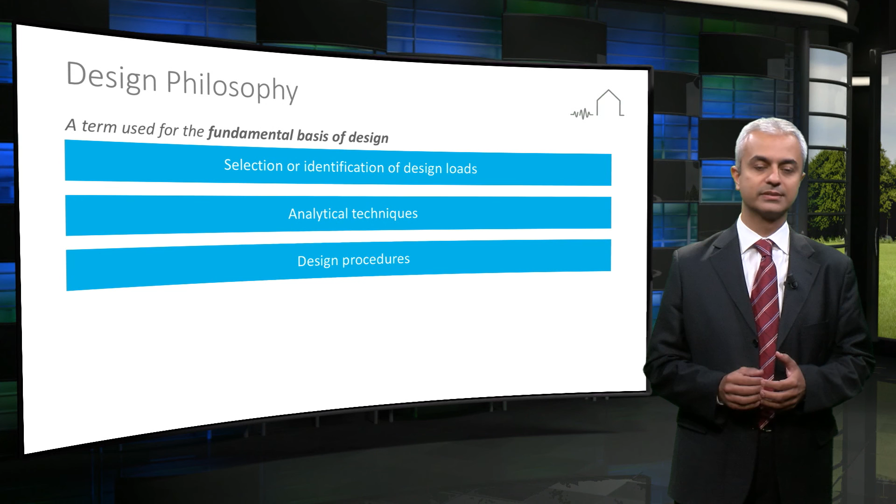When designing a structure, several fundamental issues need to be taken into account. The design philosophy includes the selection or identification of design loads, the determination of the appropriate analytical techniques and design procedures. Furthermore, defining the structural configuration also plays a part. And last but not least, the extent of economic optimization is considered.

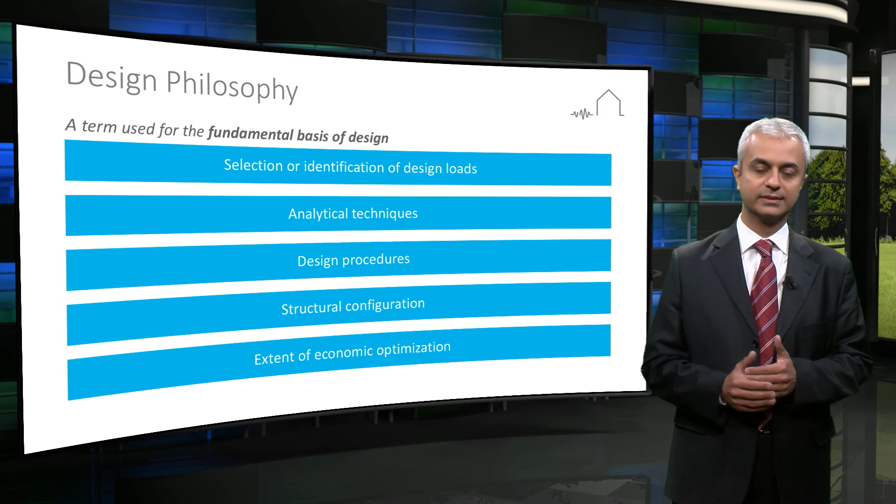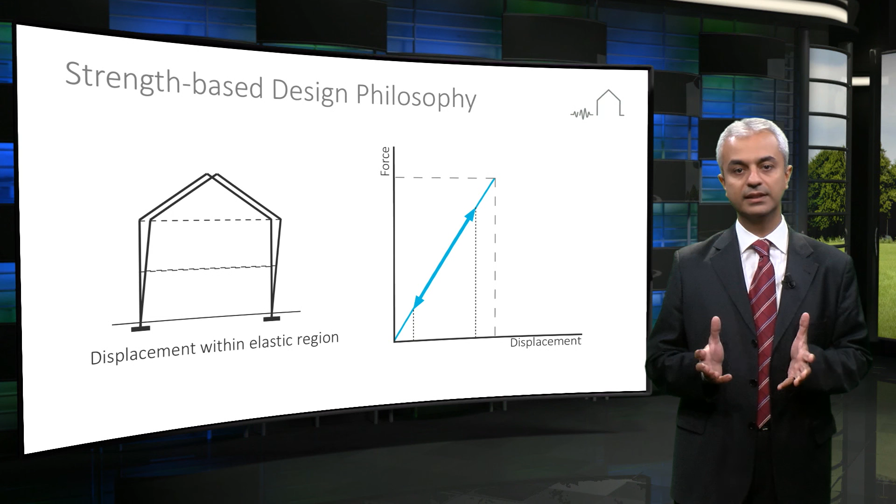In this case, we say that the structure responds in an elastic manner, which actually means that no permanent deformations are observed. Designing a structure with this behavior can be defined as strength-based design, and if the necessary strength is provided, then the members and the system can remain elastic and operational during their entire life.

Initial approaches for seismic design were similar to design under non-seismic actions. Effectively, this means that the structures like the one we just looked at were designed to withstand a certain maximum force. However, observations after severe earthquakes showed that, in reality, this was not enough.

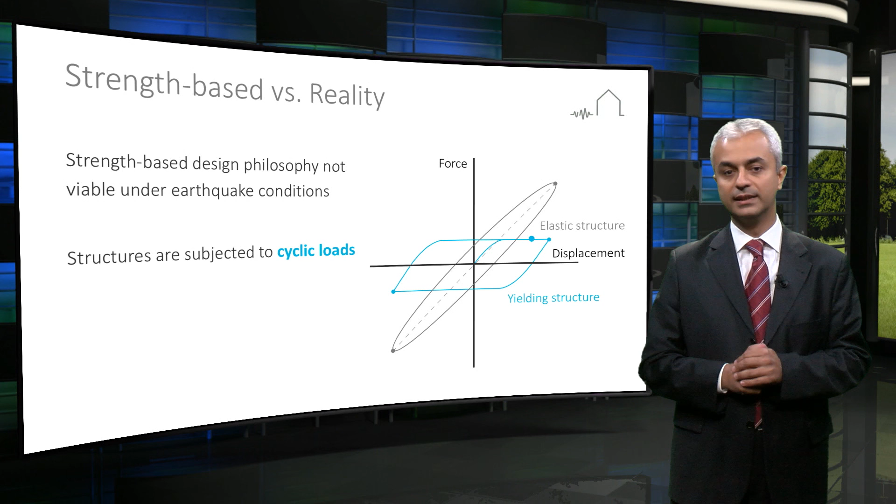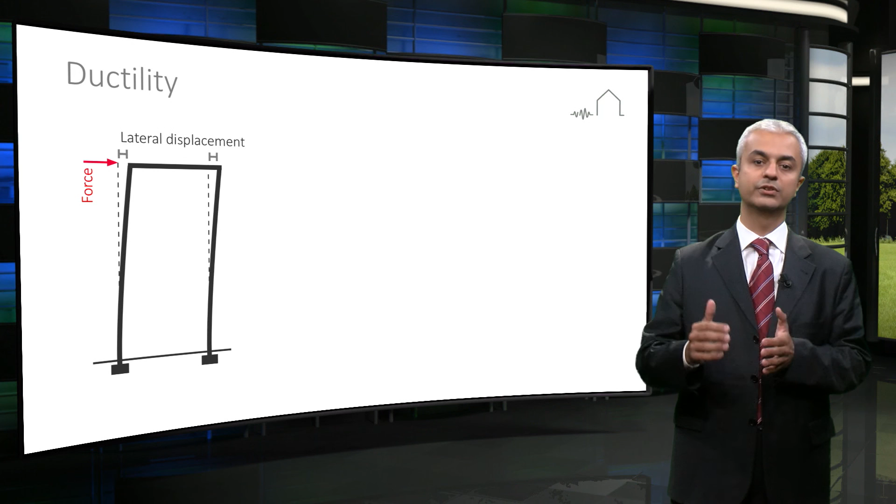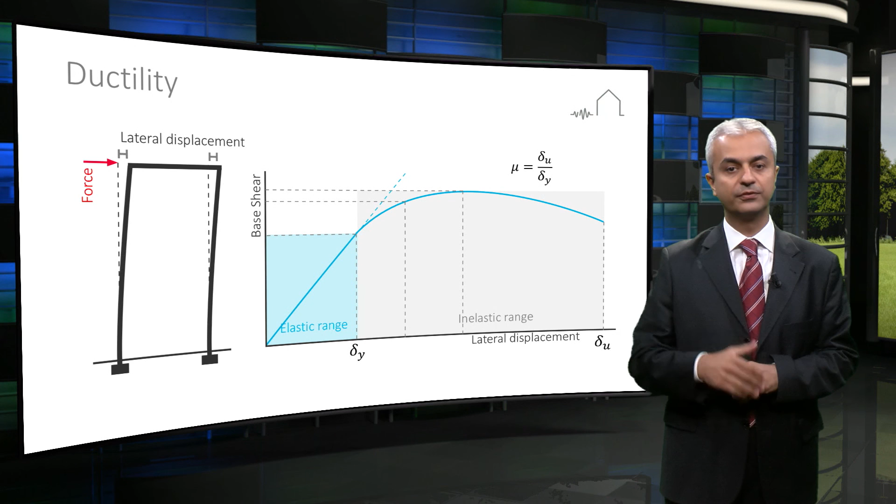Ductility defines the ability of a structure to sustain large deformations with a high proportion of initial strength and the capacity to absorb energy without failure. It is calculated as the ratio of ultimate displacement to yield displacement, as shown in the graph. The graph shows the force deformation relationship of a structure or a structural member. The area below the curve represents the amount of dissipated energy in the structure.

Ductile failure must be contrasted with brittle failure, which is accompanied by almost complete loss of resistance, generally complete disintegration, and the absence of adequate warning before failure. Brittle failure generally results in sudden collapse, and this failure mode is shear rather than bending.

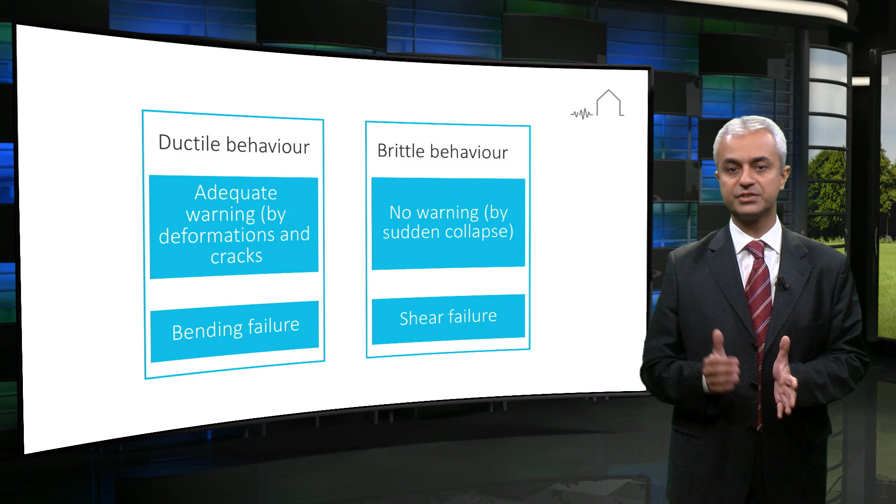It is possible to design structures to remain in the elastic range without allowing for any inelastic deformations. In such a design, ductile detailing can be skipped altogether. However, this will result in very large structural members, uneconomical structures with limited usable areas. Therefore, when considering seismic effects, design philosophy becomes very important, since in most cases, the structural response exceeds elastic range and inelastic deformations and considerable damage are expected.

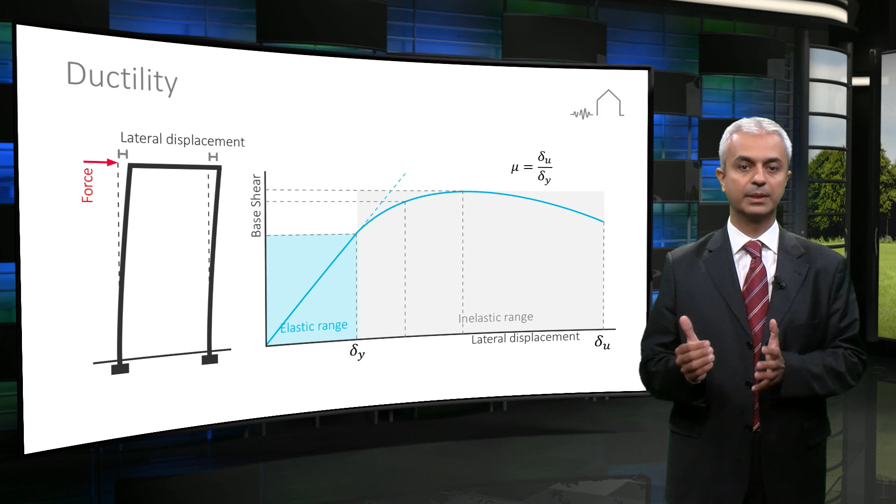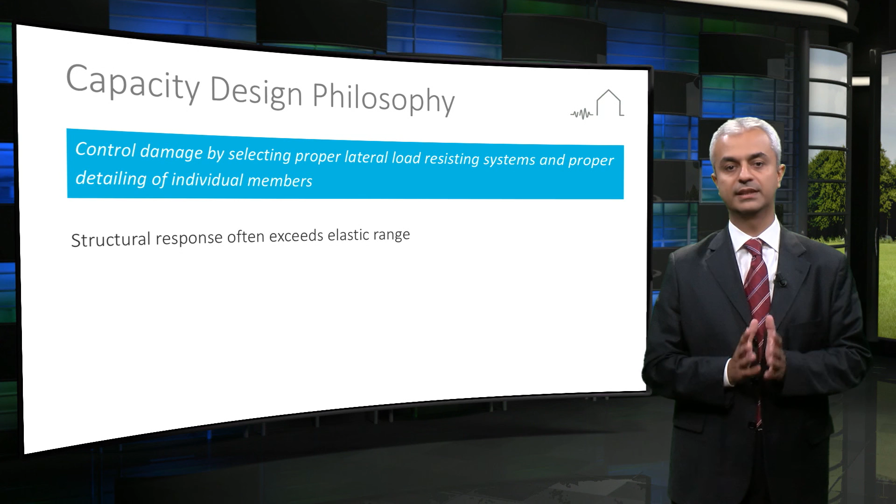The main goal of seismic design is to control this damage by selecting a proper lateral load resisting system and proper detailing of individual members. Excessive inelastic deformations should be kept in certain locations of the structure called plastic hinges. These locations are designed with proper detailing to ensure ductile behavior and to avoid brittle failure.

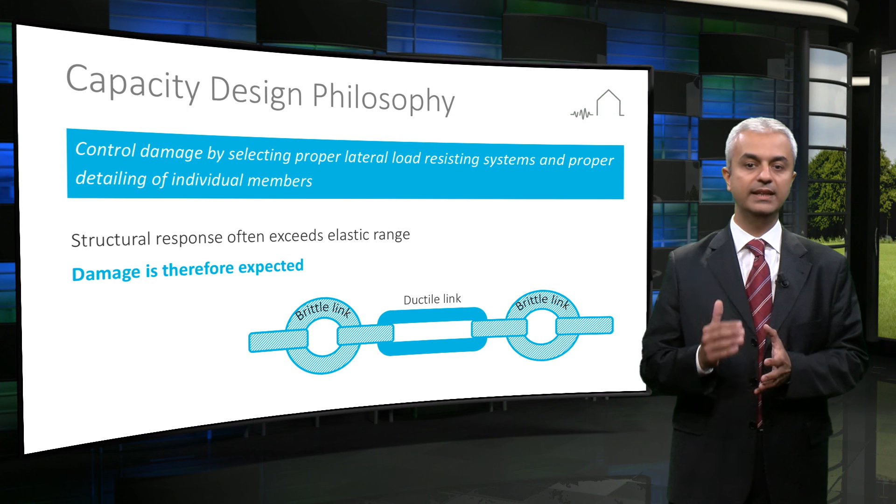This phenomenon can be visualized by a chain which is formed by brittle and ductile links. The ductile link of the chain can undergo the required inelastic deformation. Predetermining the potential damage regions or plastic hinge locations in a structure and applying proper detailing to these regions is a key element of the capacity design philosophy.

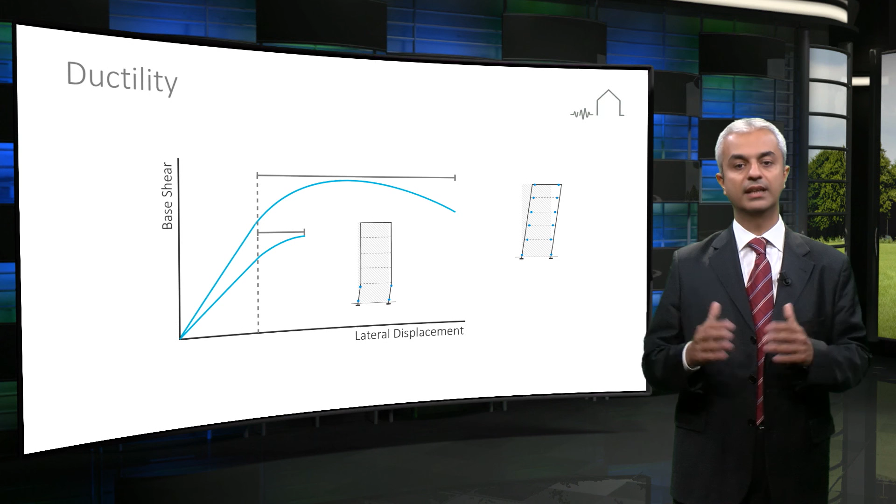This figure shows seismic behavior of two different structural systems. The structure that can withstand large inelastic deformations before collapse is more ductile than the other one. Blue dots represent the plastic hinge locations, which means they are controlled potential damage locations. Generally, if the number of plastic hinges, or in other words, controlled damage locations increases, then the ductility also increases.

In a frame structure, it is always anticipated to have plastic hinges occur at beam ends rather than column ends. Therefore, a strong column, weak beam concept should be followed. The design should ensure that the column capacities are higher than the beam capacities.

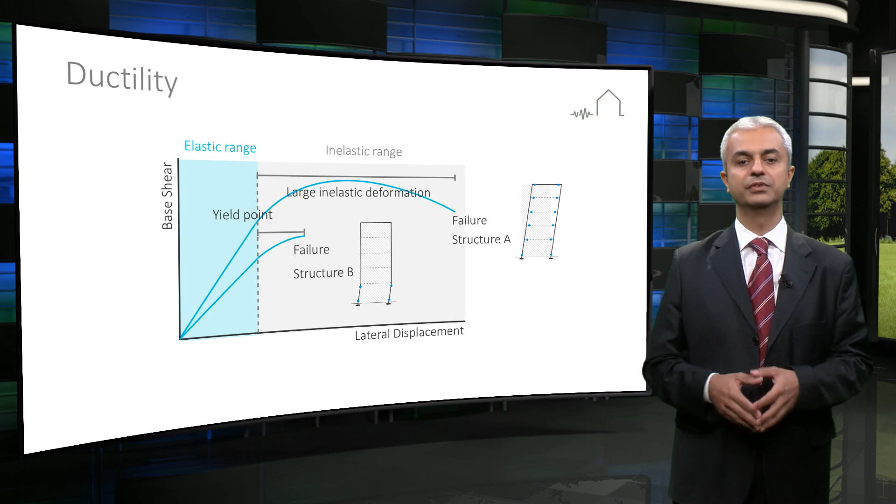So now you know more about capacity design and ductility. In the following section, we will continue with the key parameters of seismic design.